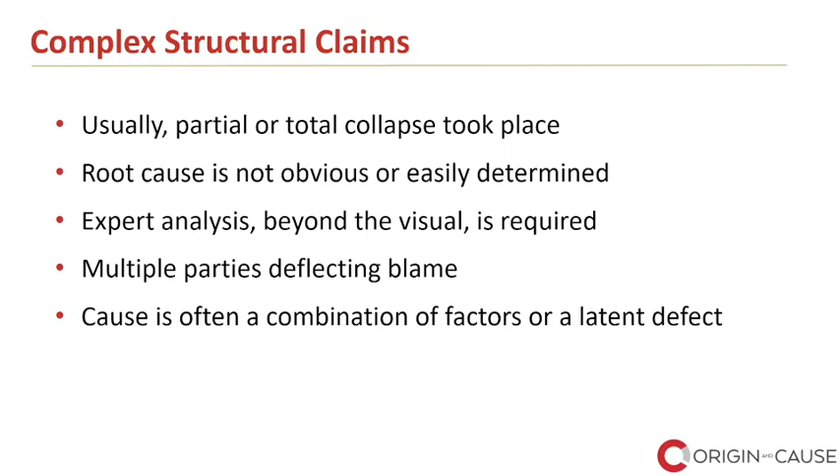So I will have the pleasure of sharing with you the first case study, and it is simply a mixed-use historic masonry building where the file, or the claim, started as simply a fire loss, like any other fire loss, and unfortunately ended up with a total loss of the building, complete reconstruction.

And the story goes that one of the occupants on the second floor had some argument with one of his associates. The argument escalated, the person comes back and sets the building on fire. So the building is badly damaged, and a restoration contractor being retained as usual, the contractor proceeds with gutting out the building for the purpose of restoration.

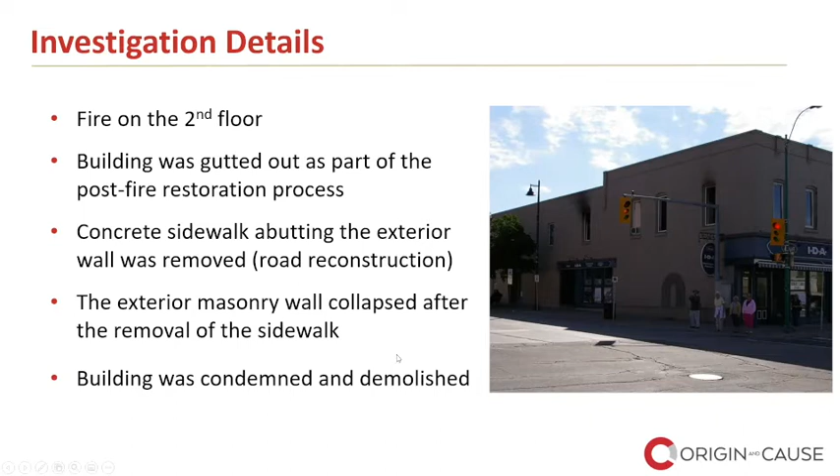This caused the exterior leaf of this wall to partially collapse, and the building was condemned and had to be reconstructed. So what happened, and how did this masonry wall collapse?

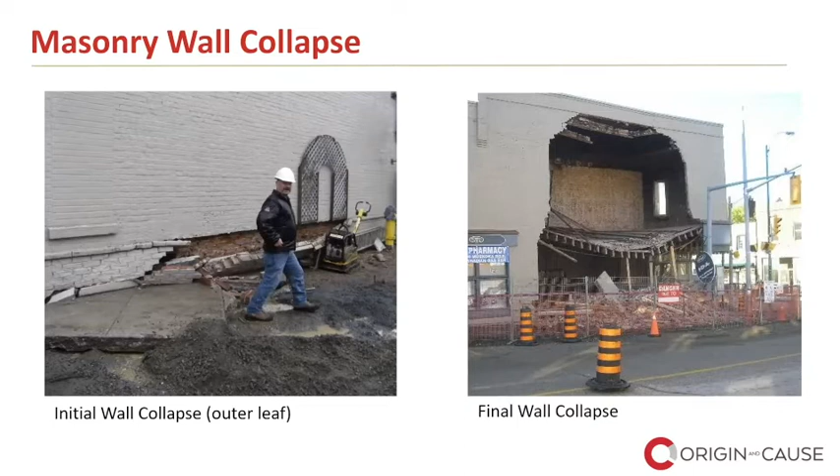Obviously, the building was unsafe at this point, and there was an imminent danger of complete collapse. So the decision was made to have controlled demolition instead of waiting for the building to collapse on its own.

In the construction prior to the incident, it appears that the exterior leaf, at least part of it, was bearing directly on the concrete sidewalk. When the contractor removed this, that caused this portion of the wall to collapse as well.

What's the impact of that on the load-bearing capacity of the wall? When the wall is in its original construction, intact, with two leaves tied together, we'll call this full capacity of the wall, 100% capacity. Over time, and remember this is a 100-year-old building, those connections, those ties between the two leaves start to crack and separate. So instead of having one intact thick masonry wall, you have a wall consisting of two layers acting separately. The impact of that is a reduction by about 50% in capacity, reduced to half.

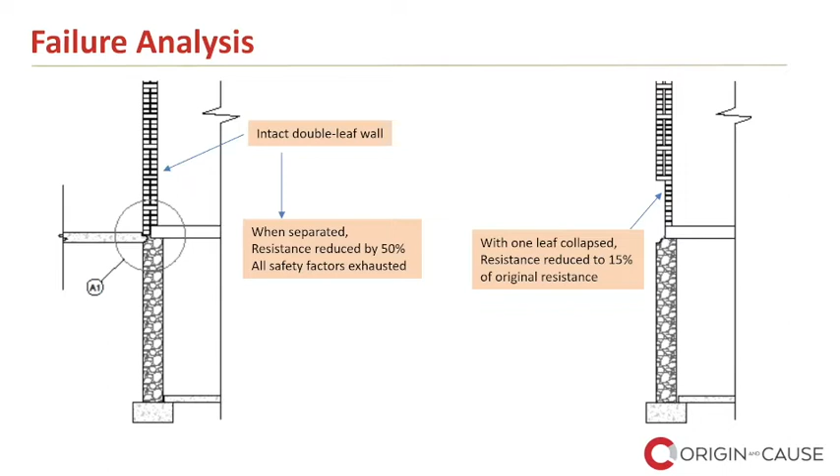Now, moving to the right-hand side, we have the wall already separated into two separate leaves. Remember, this inner leaf was found to be cracked and bulged in after the removal of finishes because of the fire, so it's already deteriorated. We lost a section of the exterior leaf of this wall, and our structural analysis showed that the remaining capacity of this wall was down to only 15% of its full original capacity. There is no surprise that the wall fell, and the failure of the wall triggered the building being unsafe, causing it to be condemned and needing reconstruction.

So what caused the building to collapse? Well, the building was over 100 years old, with deterioration to one of the leaves of the masonry walls, up to 3mm wide cracks. The two leaves had already separated, and we have discussed the impact of that on resistance.

There was some discussion as to whether fire contributed to the collapse of the wall. We demonstrated through our analysis that even if the fire incident did not take place, the exterior masonry walls would have collapsed due to the removal of the concrete sidewalk. Once you remove this major load-bearing exterior wall, that compromised the structural integrity of the entire building and required the building to be demolished and reconstructed. That was a case where it started as an unremarkable fire loss and unfortunately turned into a total loss.

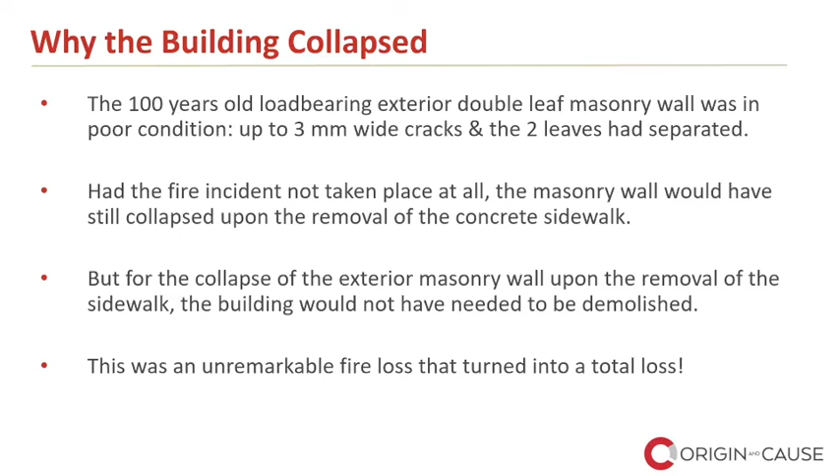Now I'm going to pass it on to Amir to share with you another case study.

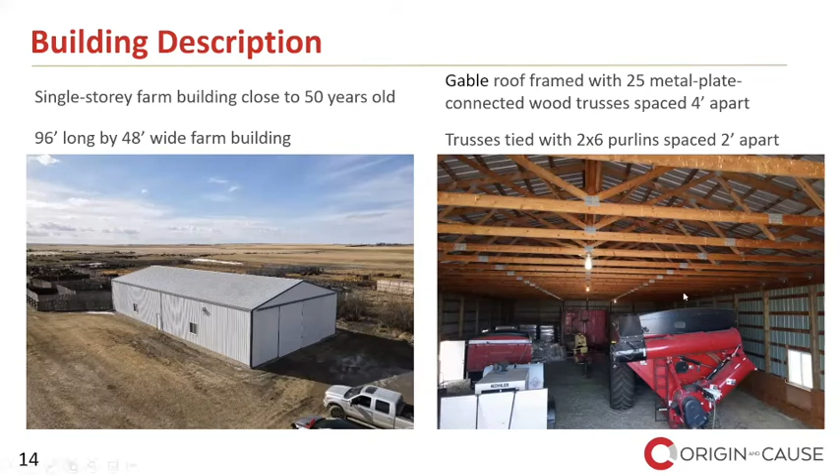The farm building was equipped with a 24-foot wide sliding door on the north wall. The door bottom track was secured to both a concrete grade beam and the wall. At the time of our examination, the sliding door was not functioning properly. Roughly a 2-inch gap was observed at the top between the door panels, and a wider clearance was observed near the corner between the sliding door when it was open and the bottom track.

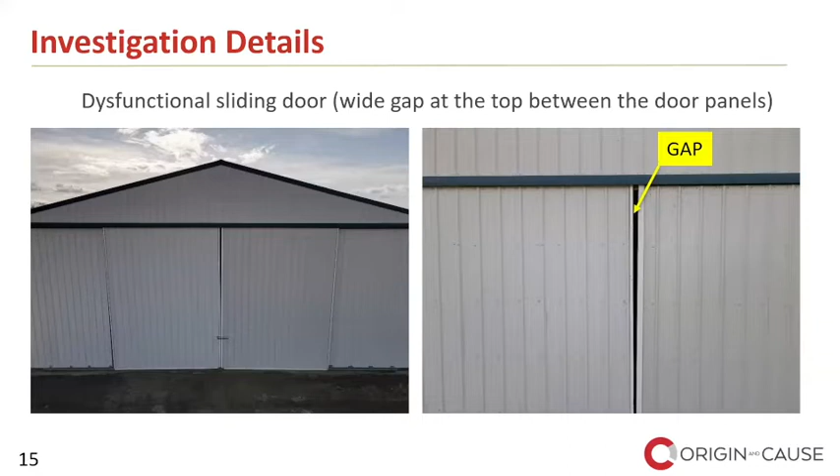Also, a slight uplift and bowing in the roof and wall were observed. You can see the uplift here, and if you notice the shadow on the left photo, that clearly tells you there was an uplift on this corner. There was also a bowing on the opposite side of the uplift in the farm building.

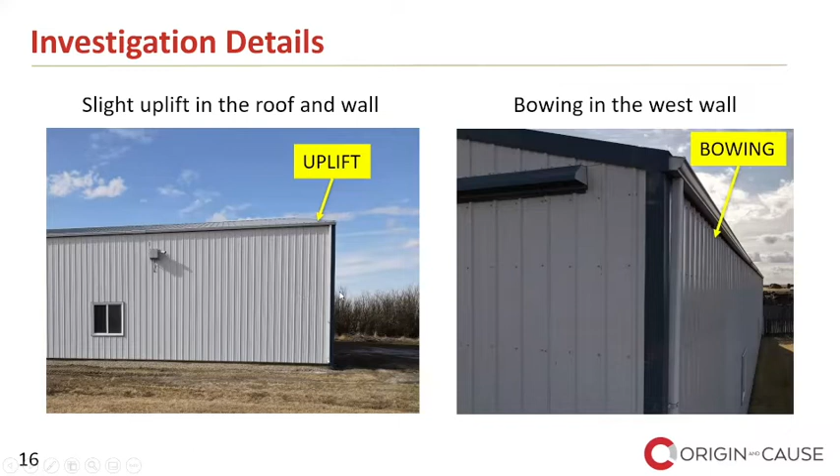In addition, a slight uplift in the post and the surrounding soil was observed along one of the walls. Looking from inside at the plywood I showed you previously, it was sloped almost about 1 degree upward, indicating that this end had been uplifted. So there was something going on there.

So the uplift of the frontal side of the building seemed to have been an ongoing issue for almost 4 or 5 years, and it was estimated to be about 4 or 5 inches. If you're looking from the elevation view of the building, this is the building drawing that we developed. So the uplift was around here, and you can see the plywood sheet we put here, 1/2 inch thick plywood.

Inside the building, these were installed later on after the first incident of the uplift. They thought that could help alleviate the issue of uplifting around the corner. It didn't help. What they did after, they used hydrovac. Hydrovac was performed on all the timber posts, to remove the problematic soil and replace it with 1-inch tamped gravel around the wood post.

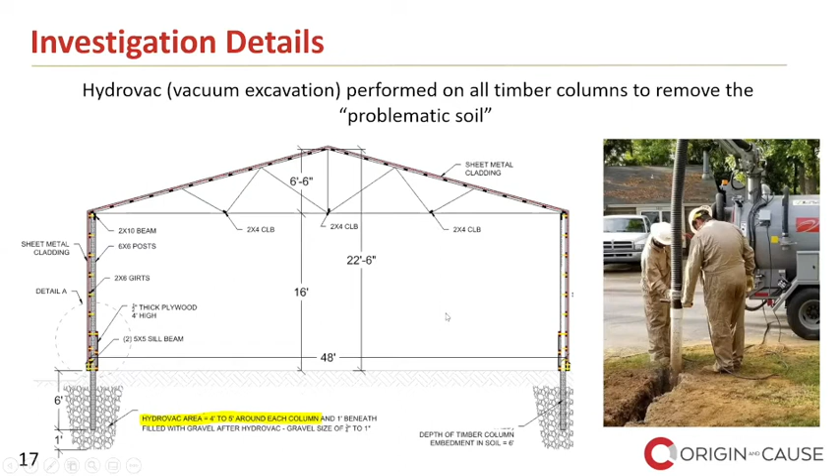Just for your information, hydrovac or vacuum excavation is a non-destructive digging process, a method of suction excavation which consists of injecting pressurized water and using a vacuum system to dig out the soil. So they also did this one. They added plywood inside, did a hydrovac, and still the issue exists.

So when I got into this project, I just wanted to understand, okay, let's look at it from all different angles. So we look at the wind gust. Since this building was almost 50 years old, either the 1965 or 1970 edition of the Canadian Code for Farm Buildings would have been in effect at the time the subject farm building was constructed. Both editions refer to the National Building Code of Canada for wind design values. The wind design data for the province of Saskatchewan was the same in both the 1965 and 1970 editions of the NBCC.

So if the subject farm building was engineered, it would have been designed to withstand a wind gust of 141 kilometers per hour, based on 1965/1970 NBCC design data for the closest city to the subject property. Based on Environment and Climate Change Canada data, the maximum wind gust recorded at the nearest location to the subject building was 89 kilometers per hour, which is less than the 141 kilometer per hour design wind speed.

So if you look at this graph here, this shows the months in 2020 from January to June for four different locations close to the subject property. The maximum wind gust was 89 kilometers per hour, in May. So it's really lower than the design code.

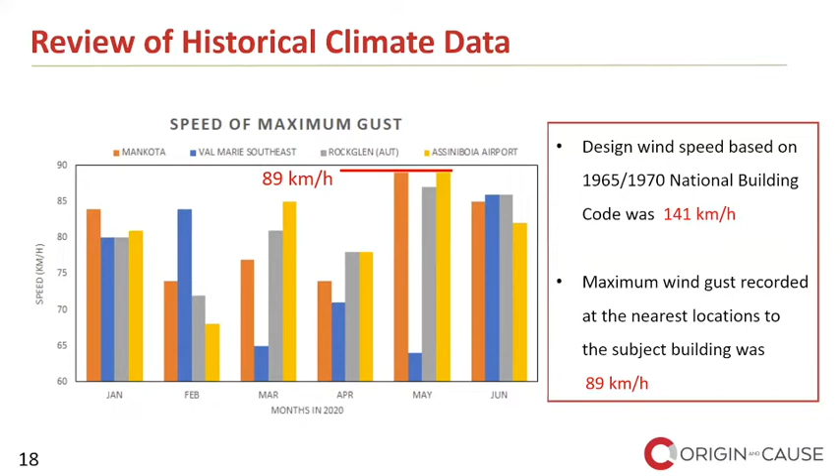So then we said, okay, let's get a closer look at the drawing, because the wind gust was not above the design. So what was the issue? If you look at this here, the top one shows the as-built drawings, and the bottom one is just a photo of the south frame and north frame, showing two diagonal braces on the north wall.

This is the north frame, north wall, on the sides of the sliding door, and one brace on the west end of the south wall was observed. No diagonal braces were noted in either the east or west walls, or across the bottom chord of the roof trusses.

In addition to resisting gravitational loads, or downward vertical loads such as self-weight and snow loads -- these are gravity loads -- a structure must also be properly framed and designed to resist lateral load imparted from wind pressure. The farm building did not have adequate framing to resist lateral load. Only discontinuous bracing was observed on the north wall on either side of the sliding door. You can see that here.

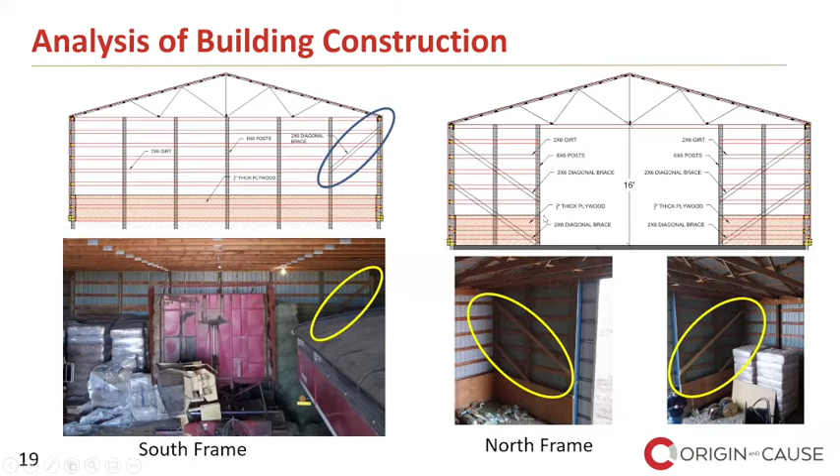Then we came and looked closer at the plan view of the drawings just to understand the framing and structure of the building. As you can see here, this is a plan view. The north and south end walls were the only members and only part providing resistance to wind blowing in the north-south direction. The 24 foot wide sliding door here, that opening, reduced the stiffness of the north wall by approximately 50% compared to the south one.

So zooming in here, this imbalance between the stiffness of the end walls resulted in the development of twisting of the building under wind pressure acting in the longitudinal direction. The twisting of the building lifted the post on the north wall east of the sliding door here. This was the location where we had the problem.

So if you look here, the imbalance or the difference between center of mass and center of rigidity causes the twisting of the building. The more distance you have between these 2 points, the more twisting the building would experience.

Just for your information, the center of mass is the point where the entire mass of the floor acts, and the center of rigidity, or sometimes we call it stiffness, is where the entire stiffness of the building acts. So that obviously clearly answers what the issue was.

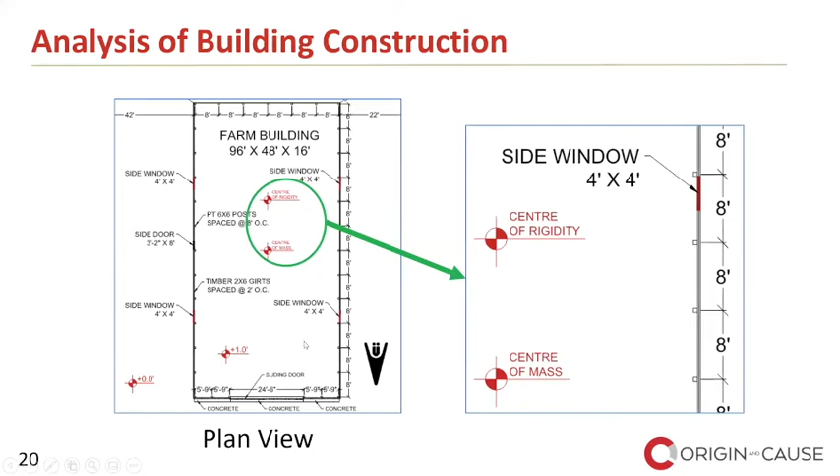Just to summarize why the building lifted: we couldn't find evidence that the subject farm building was properly engineered. Also, as shown in the previous slides, the wind pressure never exceeded the building design code of 141 kilometers per hour.

We found significant pre-existing structural deficiencies that rendered the building particularly vulnerable to twisting and uplift under wind load. But for these pre-existing structural deficiencies, the farm building would not have sustained the reported damage, because it lacked an adequate lateral load resisting system, and the roof trusses were widely spaced.

Wood posts are typically supported on concrete piers or sonotubes that extend about 4 feet minimum below grade. The posts of the farm building were 6 feet deep in the ground without any bearings, which is analogous to sticking a needle in the ground.

The sill beam may have helped the post resist vertical downward forces, but the only resistance to uplift forces was the friction between the post and the soil.

Although it was well intended, replacing the soil around the post of the farm building with gravel, using the hydrovac technique, most likely weakened the resistance of the embedded post to uplift, because gravel has a lower friction capacity compared to clay or silt.

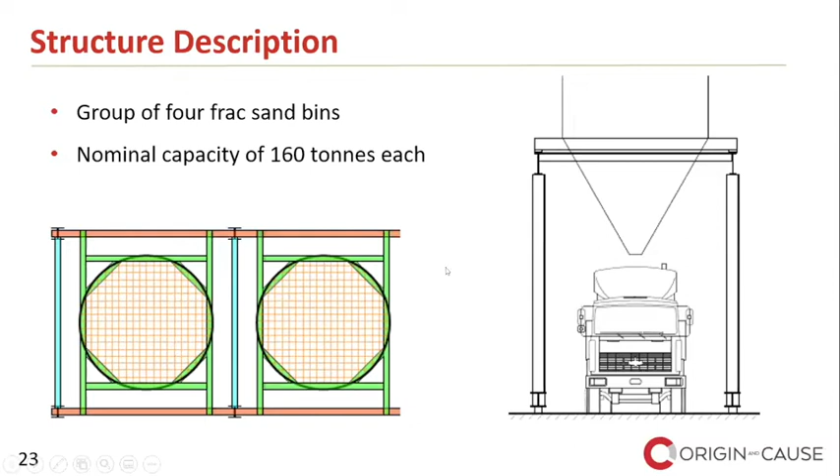The structure had been recently constructed. They had just recently filled bins 1 and 3. Bin 4 was still empty, and on the day of the incident, bin 2 was in the process of being filled.

Some loud noises were heard coming from the structure, so they stopped filling and sounded the alarm to keep personnel away from the bins. Shortly after, bins 2 and 3 came crashing down. A little while later, bin 1 also collapsed. Bin 4 was then removed just to make the site a little bit safer for investigation, because it did present a hazard at that point.

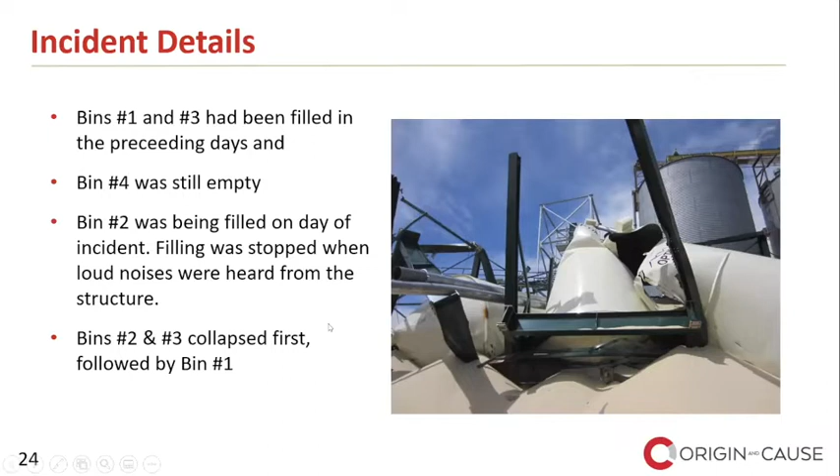So at the onset, there was blame being suggested in all directions. Could it have been something to do with the bin? Could have been something to do with the load cells. The designer of that structural steel frame to elevate those bins, the fabricator of the steel components, the erector—in this case not the same party as the fabricator—the party that put everything together and did all the welding on site. And then also in this case, there was a steel pile foundation, so is it possible that the steel pile installer did something wrong?

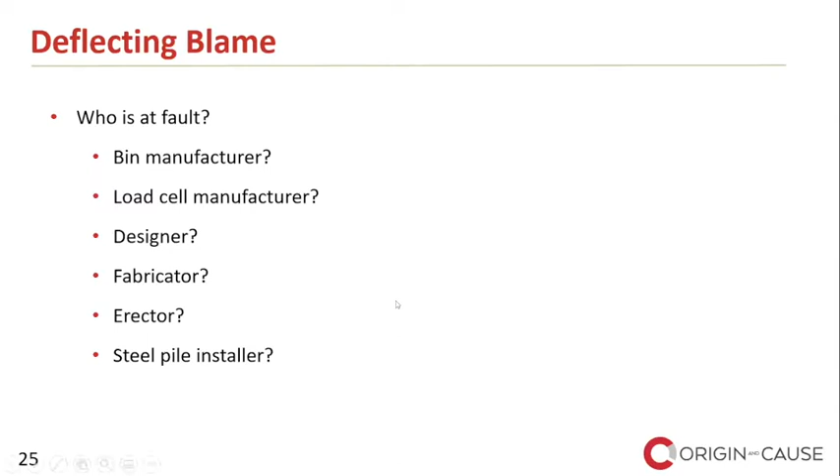We started by analyzing the entire structure, and we didn't find any serious indication of a problem with the columns or the beam sizes. Everything seemed to have been sized correctly. We were able to rule out the foundation and the bin and the load cell pretty quickly. But after ruling out the members themselves, the beams and the columns, we had to take a look at the connections between those parts.

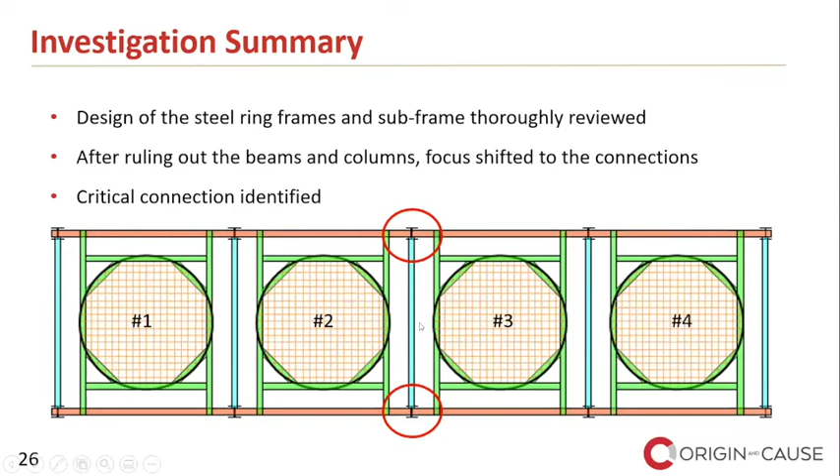So when we started honing in on the connections, we identified this critical connection here at the middle column line. What this was originally envisioned as, when it was designed, was that this would be one continuous girder across 5 columns. But then at some point that was changed so that it was 2 girders joined over the column. And that turned out to be very important.

So that column was originally intended to be continuous, but it was changed to this. Now the end of this beam is sitting on the plate and nothing else. There's nothing under the beam directly below that plate—it's just sitting on a little patch of the plate. And this plate itself is not designed for that type of loading.

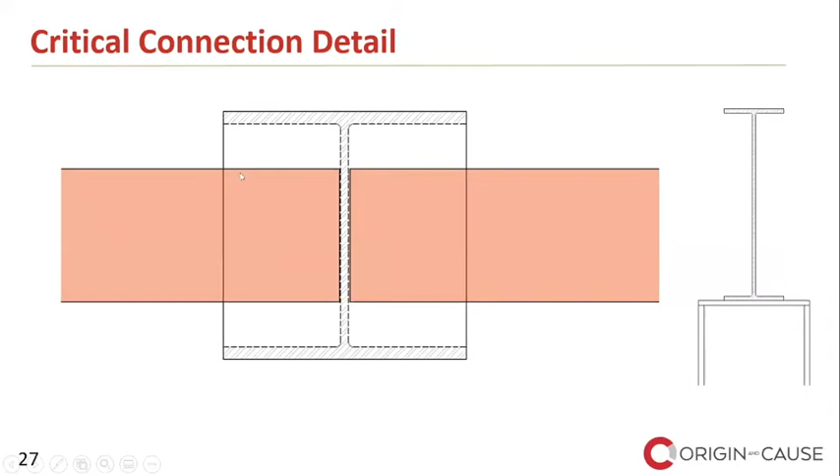But this alone was not—this alone would not have brought the entire structure down. In fact, once it starts to yield, it starts to behave like a stretched sheet or a clothesline. So it would still have reserve capacity as long as nothing else goes wrong, which might have given enough time for someone to see it in an inspection and give some warning.

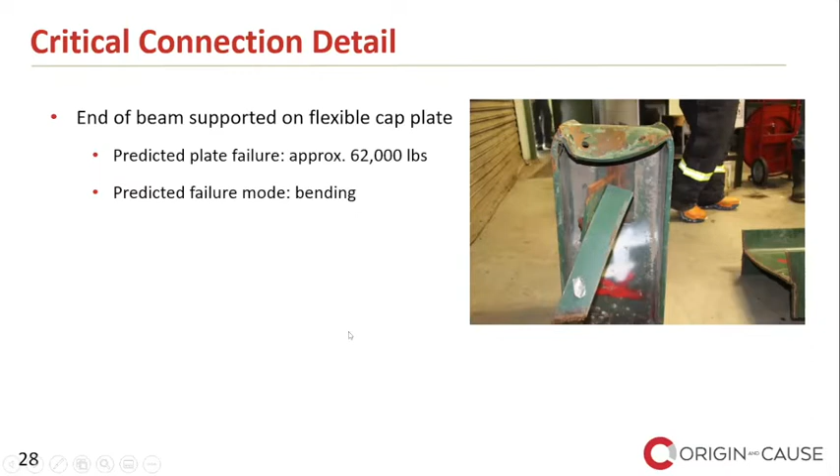We predicted a failure load of about 80,000 pounds, which was awfully close to the estimated load at the time, like when the failure occurred.

So what happened was the plate that this was sitting on, as it started to yield, reduced the effective length that this beam was sitting on—the effective support length. Then this web crippling occurred, and then the final straw was just the bolts holding everything together snapping and tearing out.

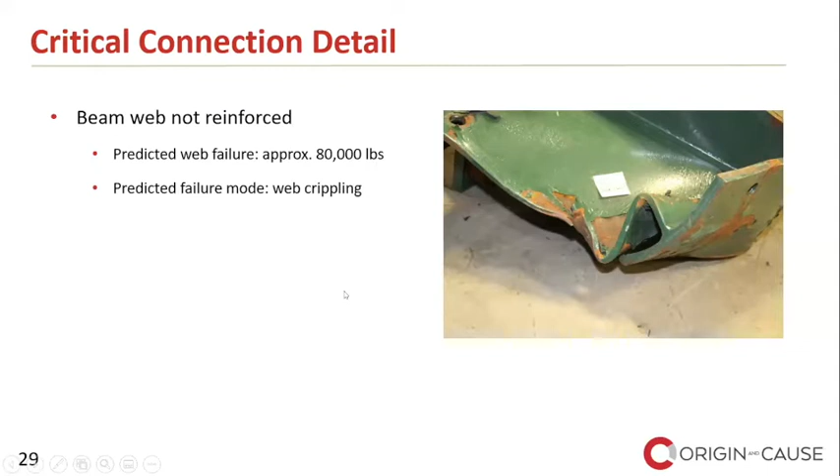This collapse of the sand bin structure and significant interruption to their business all came down to a single connection that conceptually was changed, but that decision to change that connection was not followed through and checked to make sure that we had a load path that was still acceptable.

So the column cap plates first began to yield. That reduced the effective support length for the beams. Beam web crippling occurred, and then finally the bolts holding the beams onto the columns failed, resulting in bins 2 and 3 collapsing. The extensive amount of damage to the structure just in the process of collapsing resulted in bin 1 also collapsing.

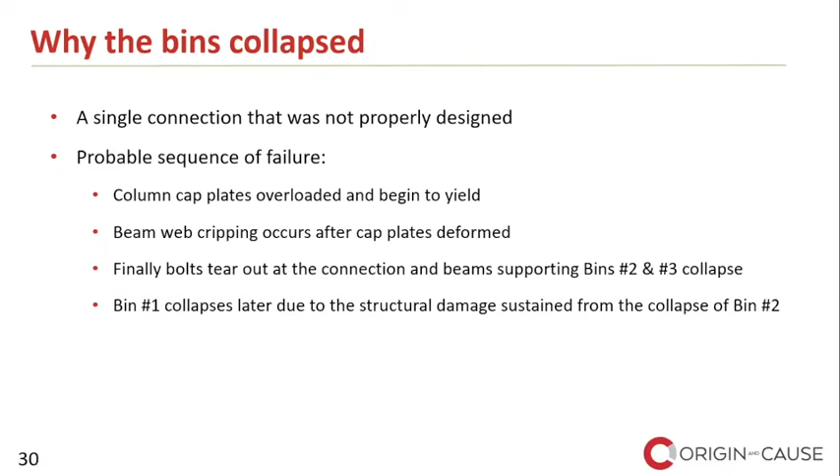And with that, I will hand things off to my colleague, Navi.

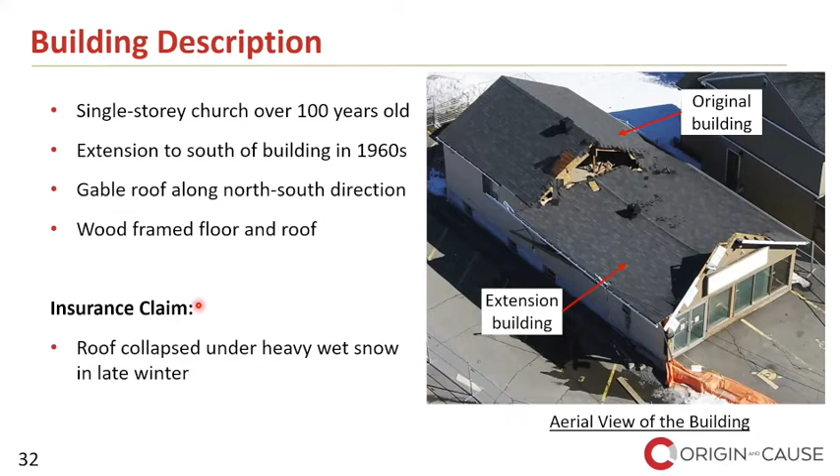Now, why is this a complex claim? First of all, it was an unsafe condition. I could not get inside the building or even get around the building to see the connections or the failed members. The other factor is the nature of the incident, by that I mean the sudden roof collapse of a public building.

Now, I should explain that public buildings have stringent design requirements by the code. Usually we see a roof collapse, let's say in warehouses or farm buildings, that have relaxed design requirements. But when it comes to residential buildings, there are strict requirements. When it comes to public buildings, it's even more strict requirements.

And the rare failure mechanism—I will explain later how it collapsed—was the edges slid out and the gable roof literally turned into a flat roof here. As you can see, there's no attic left under the collapsed roof of the extension. That's a very rare failure mechanism.

Usually if we see some damage to the roof, there's maybe a couple of rafters that get cracked or they get deflected, or the roof is sagging. The damage is usually of this type, but for a roof to collapse, for the entire roof to collapse like this, is a rare case. And the claim value was about $1 million.

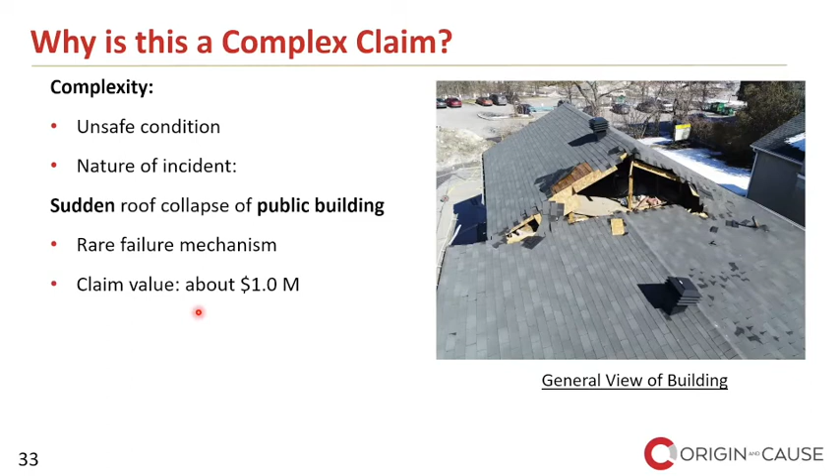Now, for investigation, we started the investigation and we noticed that, as I mentioned, the collapse was only concentrated in the roof of the extension building. The original building's roof was almost intact. As I said, it was unsafe.

We used a drone to closely look at the details around the roof edges, and also we flew the drone inside the attic of the standing roof. And we looked into the design ground snow load based on the code of the time the extension was built.

That was NBC 1960. Based on the code, it should have been designed for 33 inches of ground snow load. And then we looked at the historical weather data and found that on the date of loss, the ground snow load was 21 inches. And the maximum historical ground snow load for the location of the building was 53 inches.

So right here, you can see that had the building been designed properly to the code of the time, it would have easily carried the snow on the date of loss. So right here, we can say that there must be something wrong with the structure. Now, we should see what was wrong.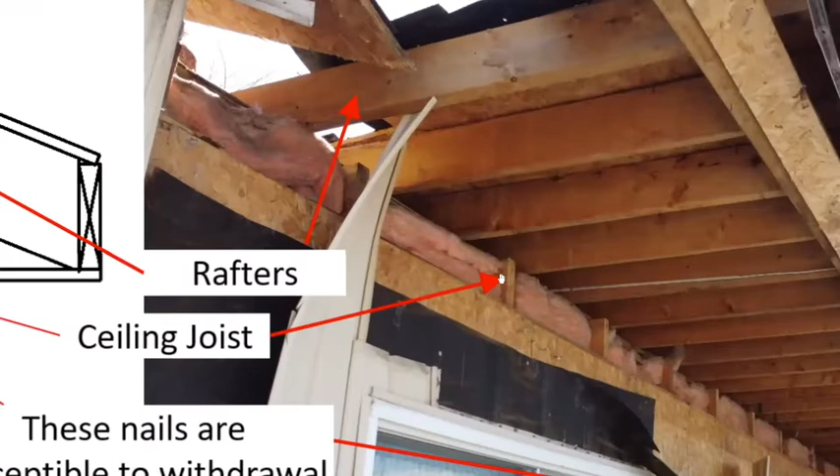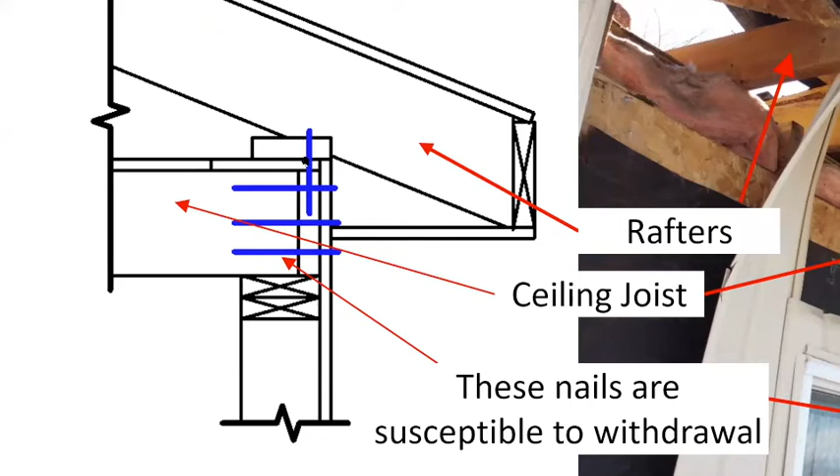So in the photo, you can see the ceiling joist here, this is the rim board. The rim board was up against the ceiling joist. These are the rafters, sitting on a top plate, and this is a piece of OSB. This was a top plate, the rafter was sitting on it, and the rim board was just connected to the ceiling joist. Now the problem here is...

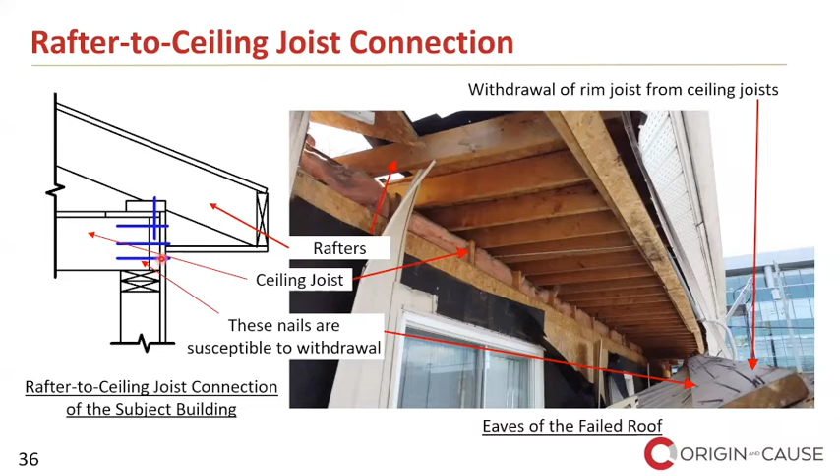There's tension in the ceiling joist, which means these nails were in tension. And the nails, as you know, have a smooth shank, and they were embedded in the end of the ceiling joist. So they are very weak in carrying tension, so they could easily withdraw from the end of the ceiling joist, which is what's happened here.

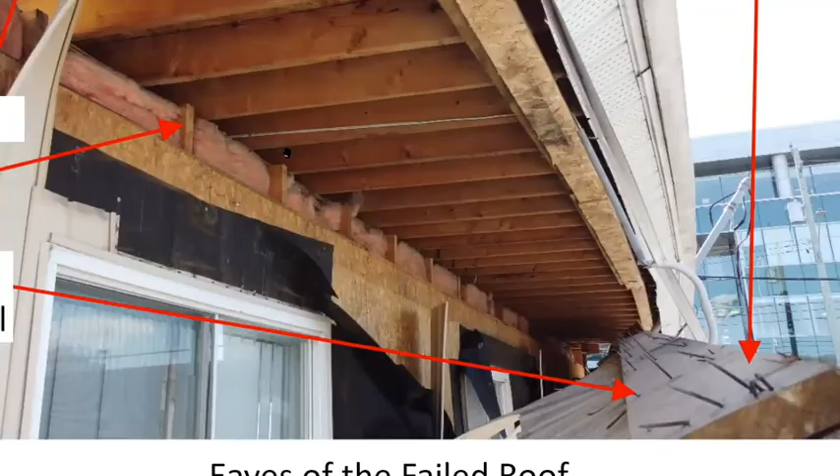Again, the detail of this particular building versus a typical detail. In a typical detail, we have, let's say, 6 or 8 nails face nailed from the ceiling joist to the rafters. In this configuration, the shank of the nails are not in tension, they are in shear. But here, when you nail it like this, the nails are in tension, so they just pull out.

Now, this is not a sudden failure mechanism. This is gradual, which means over many years, over many winters, they pulled out gradually, and then eventually on the date of loss, under some snow, it just collapsed.

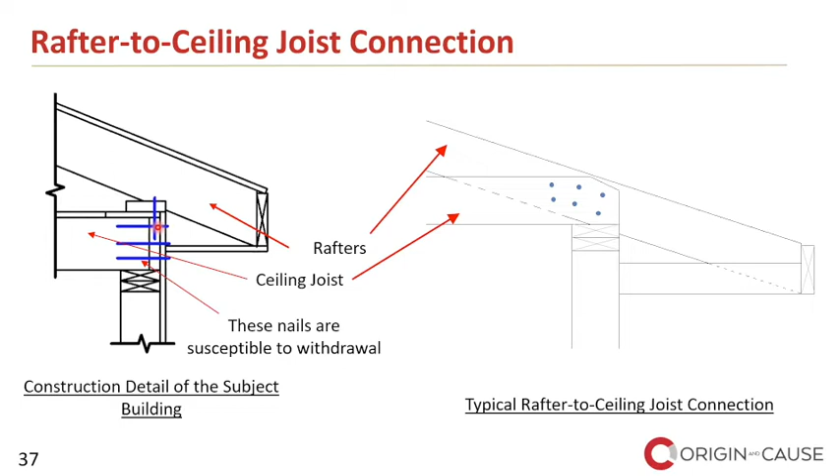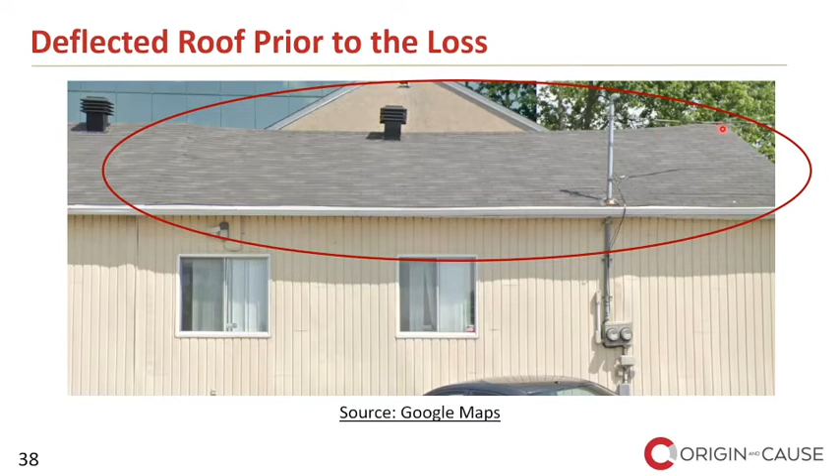This is an image we took from Google Maps that was taken a couple of years before the date of loss, and you can see a significant sagging of the roof. So this is the original building, the roof is good. Here you can see it's just sagging down, exactly like a saddle.

So why did the church roof collapse? The probable cause was pre-existing construction deficiency. It was not the snow. The construction deficiency was the improper connection of rafters to the ceiling joists. The collapse was a result of gradual failure of connections over many years, it was not a single incident. And depth of roof snow on the date of loss was less than the designed snow load. In other words, if it was designed properly, it would not have collapsed.

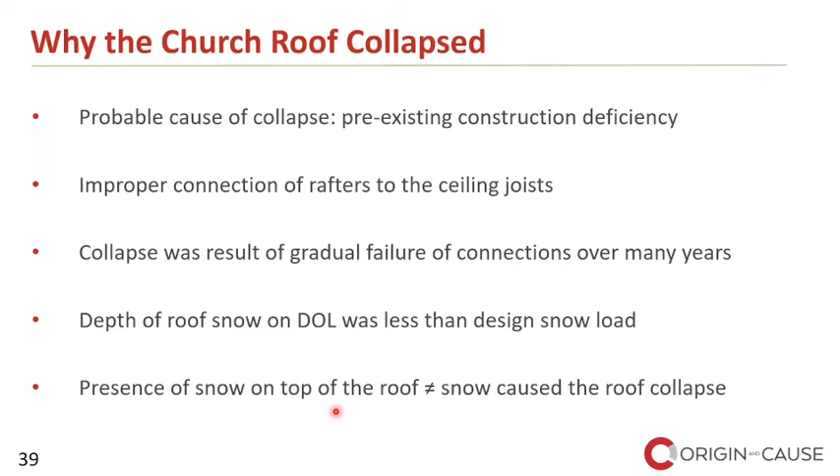The lesson learned from this example is that presence of snow on top of the roof does not necessarily mean the snow caused the roof to collapse.

So based on the case studies that we presented in this presentation, what to look for in a complex claim. First of all, building safety and security is paramount in all claims, especially complex claims or large claims.

A structural engineer should be retained from the get-go, assess the site, and give instructions on the safety measures. There are obligations under orders to remedy unsafe buildings. When there is severe damage, the city usually issues an order to remedy an unsafe condition. Under that order, there's an obligation to retain a structural engineer to assess the site and give safety instructions. So by retaining a structural engineer from the get-go, you're saving time and satisfying these obligations from the beginning.

The impact or role of pre-existing conditions is very common in different losses, also in large losses. As you saw in the previous scenarios presented here, pre-existing conditions can be deterioration of a masonry wall, as in the case study by Yasser, or lack of bracing, as in the case study by Amir, and just lack of a couple of stiffeners or discontinuity of the beam in the case presented by Adam, and also poor detailing in this church.

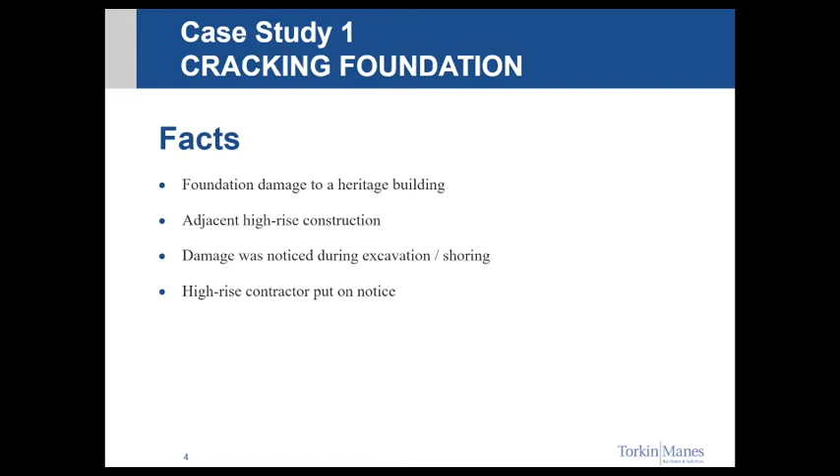The facts of the case were that foundation damage was found in a heritage building. There was an adjacent high-rise construction. Damage was noticed during the excavation and shoring of that high-rise construction. And so the high-rise contractor was put on notice.

Here you can see the east wall of the heritage building that was damaged, and a pretty good look at the excavation and shoring work being performed by the contractors to the east. I wanted to point out that the shoring work is all fairly flat and uniform across the surface. It's consistent, and I want you to keep that in mind because I'm going to refer to it again in an upcoming slide.

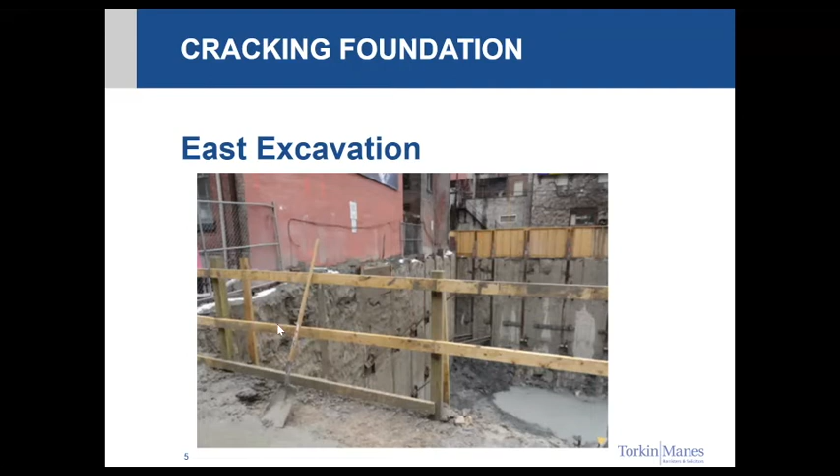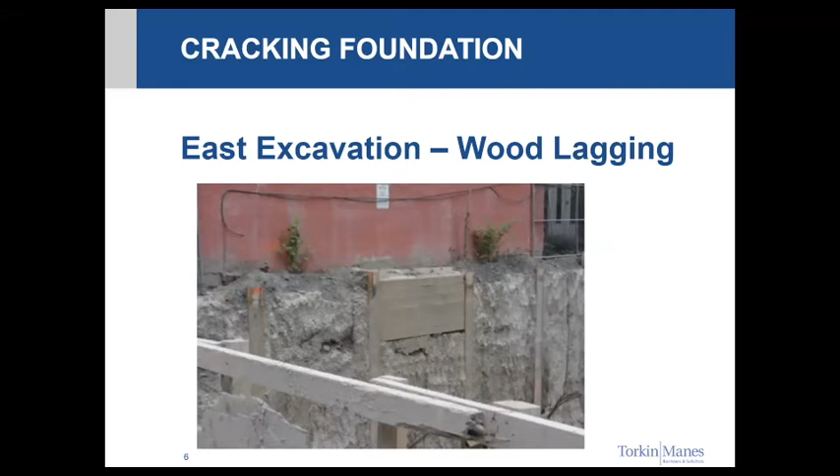This next slide shows the east excavation and some wood lagging that was installed. Not exactly sure why it was installed, but there was interior damage to the foundation of the heritage building on the other side of that lagging, and potentially a source of the foundation damage to the building.

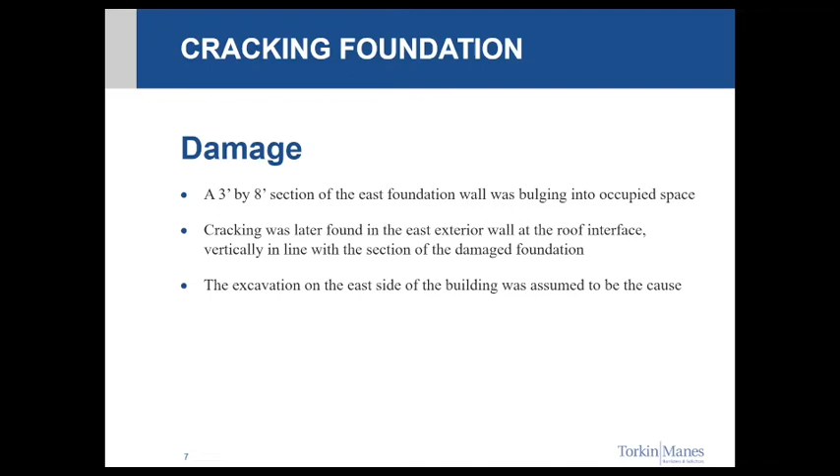The damage itself included a 3x8 section of the east foundation wall. It was bulging into the occupied space. Cracking was later found in the east exterior wall at the roof interface, vertically in line with the section of the damaged foundation. And the excavation on the east side of the building was assumed to be the cause.

Looking at the causation issues, the damage was likely caused during the excavation and scraping of the east wall by the excavator bucket. That's how that uniform surface I referred to was achieved. However, an engineering inspection determined that the cracking and bulging was pre-existing. So we had a problem. The complexity in this case was what damage was pre-existing versus the damage caused by the construction.

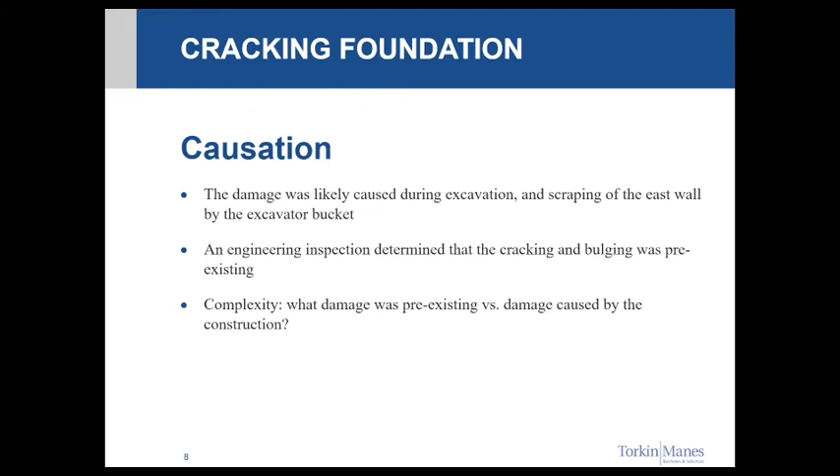The insurance in place: 3 policies. There's a builder's risk policy. It refused coverage, as those typically apply only to property under construction and the project itself where the high rise is being built. So what do we have left? We have a CGL and a wrap-up liability policy. Those insurers refused to become involved because the damage was not caused by any apparent negligence.

The expert opinion determined that the damage was pre-existing and naturally occurring over time, given the age of the building. But on the other hand, there's obvious construction disturbance to the east, along with complaints by the occupants. So we've got a real pickle. The matter looked to be headed toward long drawn out litigation, and yet it resolved within only a few months. And why? What unlocked the stalemate?

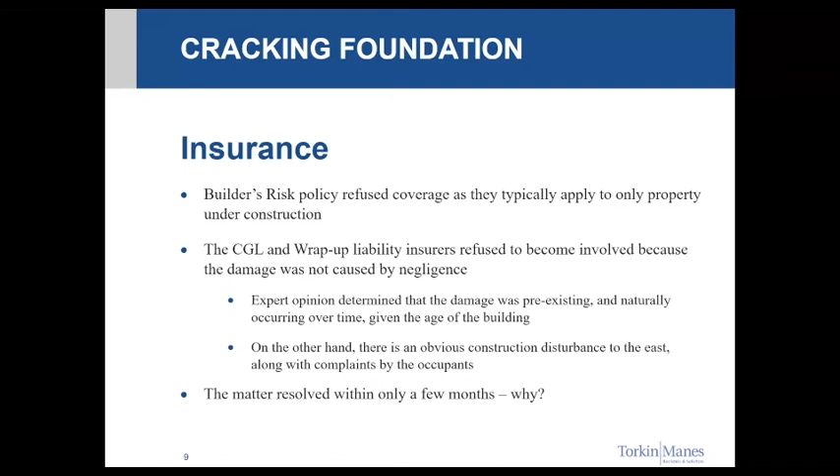Reason one: the ongoing monitoring by the engineer revealed further and additional cracking in the building. The additional cracking was occurring at a rate greater than natural deterioration. The accelerated rate of cracking could only reasonably be related to the construction vibrations.

So the ongoing damage to the heritage building exposed the liability insurers. But there's still this question as to whether the contractors were negligent. Just because this cracking is taking place, it doesn't necessarily mean that the contractors breached the standard of care.

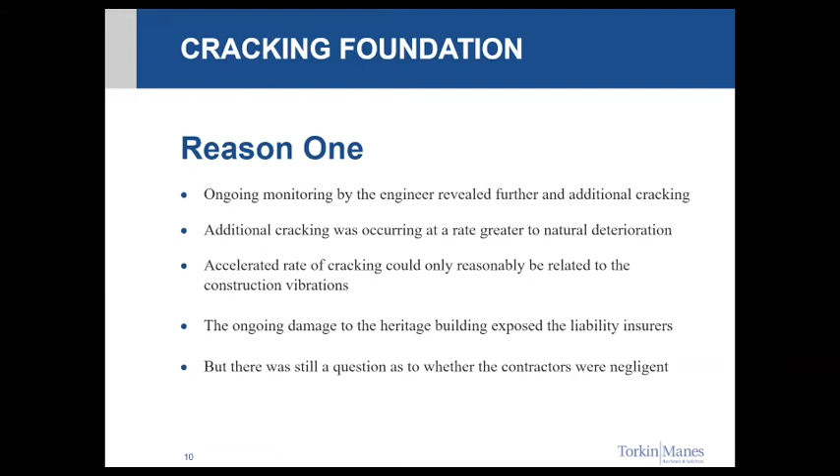The second reason: the heritage building owner secured a tieback and crane swing agreement with the general contractor before construction commenced. The tieback agreement contained an indemnity clause favorable to the heritage building owner. It also included a clause ensuring that the general contractor secure insurance coverage for liability assumed in contract.

The tieback agreement exposed the liability insurers as a result. The agreement itself, the policies both had insured contract exceptions to the typical exclusion for liability assumed in contract.

And I know that there is some debate over what those should apply to and when. In some cases, the insured contracts that provide an exception to the liability in contract exclusion are quite limited. They're sometimes listed as very specific types of contracts, and if you don't fall into any one of those categories, then you don't fall into the exception.

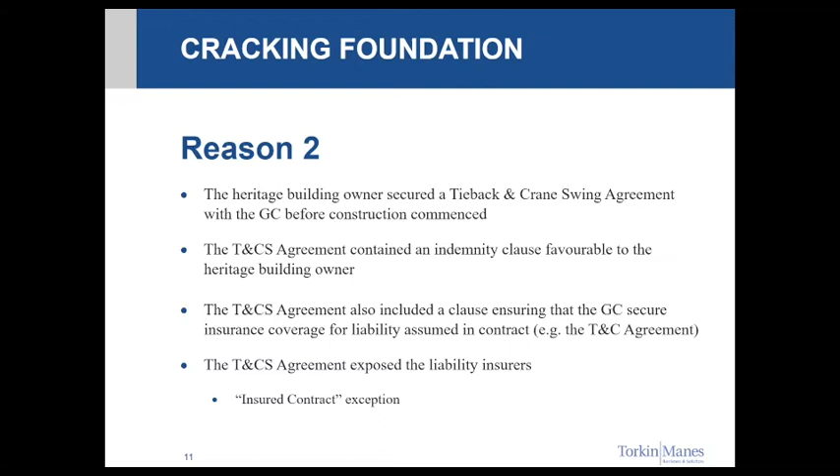And in other cases, it's generally contracts that are usual to the business of the insured. In this case, this type of contract, this tieback agreement, was usual to this insured's business, and so there was exposure. When we look at the indemnity language, it is significantly broad.

I've highlighted the portions of this indemnity language and sort of faded the parts that are less important. So I'll read it out: the company agrees to indemnify and save the owner harmless from and against any and all claims incurred by the owner and arising directly or indirectly out of or in relation to the exercise by the company of the rights granted to the company under the agreement.

So right there you have the words directly, indirectly, or in relation. And the case law generally, looking at this type of wording, will choose the broadest wording and apply it. So whether you think indirectly is broader than in relation to, or vice versa, that determination will be made by a court, and they will apply the broadest language, which I believe - referring to a memo I've read a few years ago - I believe in relation is the broadest language.

And if that's not enough, it goes on to say, and/or in connection with the construction and completion of the project. So whoever drafted this indemnity agreement tried to touch on all the different ways that there could be some kind of connection to a liability.

And then further, if that's not enough, it says that the company agrees to indemnify the owner in respect of all claims arising out of any damage caused to the lands and/or any buildings, the heritage building itself, arising directly or indirectly from or incidental to - again, all the different types of language you might see used once or twice, but all the players are here - with respect to the company's rights granted under the agreement, again, quite broad.

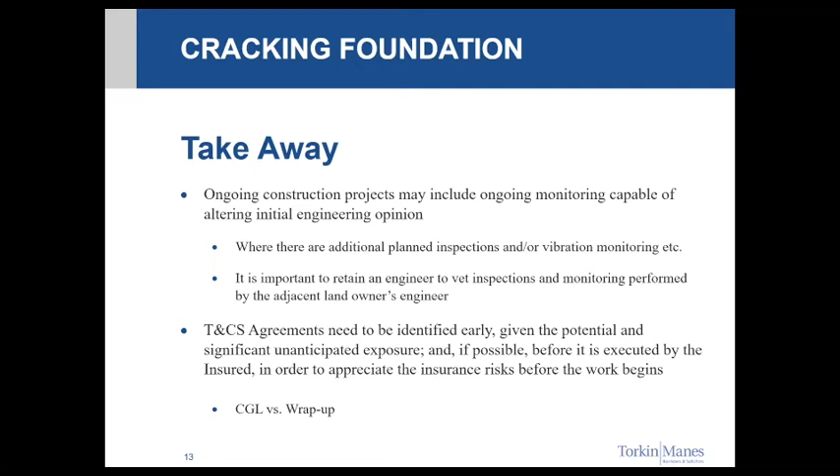This one is a roof collapse. I'm happy that Nabi provided his Gable Roof analysis just a few moments ago, because some of it will be helpful to conceptualizing what's taking place in this example. We have a residential home with a large sprawling roof. The roof shifted under load of snow, causing significant structural damage throughout the home. The homeowner's insurer denied coverage based on the exclusion for faulty workmanship. I chose this example because it's a practical, down-to-earth example of damage to a home that everyone can wrap their heads around, and because the faulty workmanship exclusion has broad application across a number of different types of policies, so the issues can overlap depending on what you're working on.

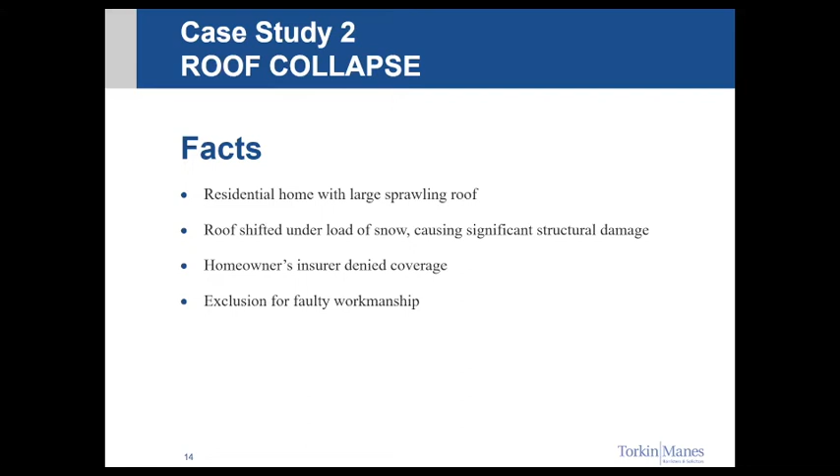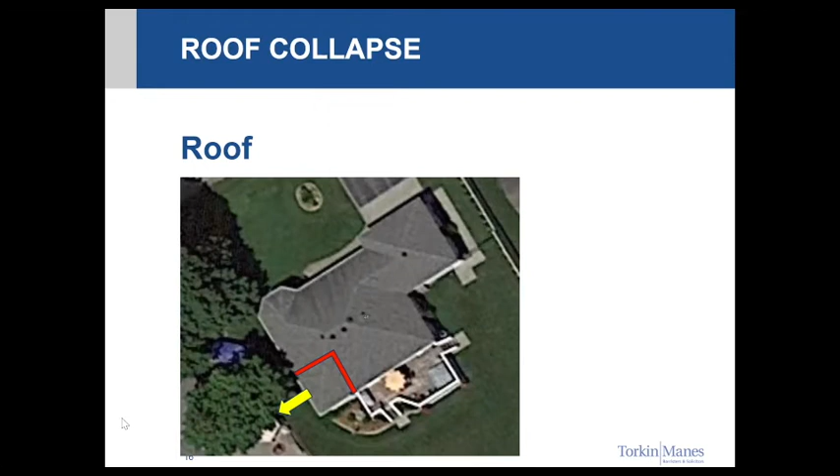Underneath that right angle was the den for the home, which had a cathedral ceiling. Here is an exemplar photo of a cathedral ceiling to show the problems. You can see on the edges of the two walls there are 2x8 or 2x6 ceiling joists running across the entire length of the room. If those joists were spaced out across the ceiling, you'd have a flat ceiling, but to create the vaulted or cathedral appearance, you have to remove the ceiling joists, which requires the rafters to be adequately braced in the absence of those joists.

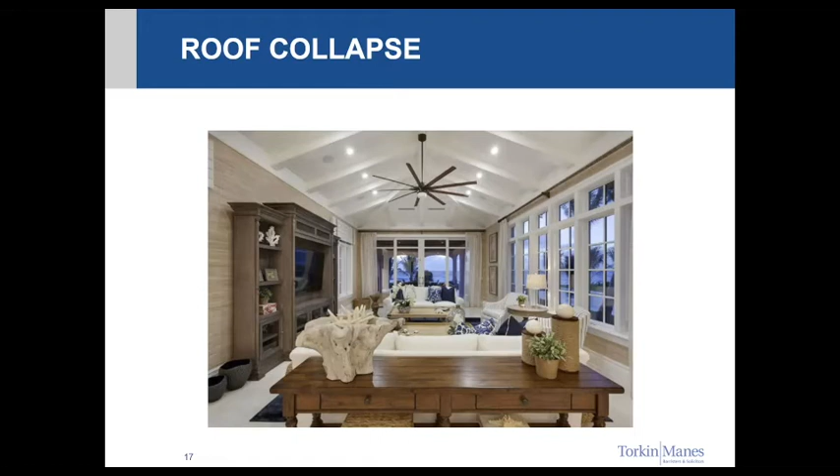The next photo is a picture of the framing of the actual home from 30 or 40 years ago—we were fortunate enough to get this photograph. To the left is a wall separating the den and the kitchen. This red line is something I've added, underlining the edge of the kitchen wall. Just above it, difficult to see given the lighting, there are a number of 2x6 ceiling joists that are cut. This blue line represents what we believe was the designer's intention to extend those joists from the kitchen wall across the den to the exterior wall, which ended up protruding and bowing outward under the snow load when the cathedral roof failure occurred. Had that blue line of joists been installed, it would have provided additional support for the exterior wall, pulling it and securing it against the internal kitchen wall.

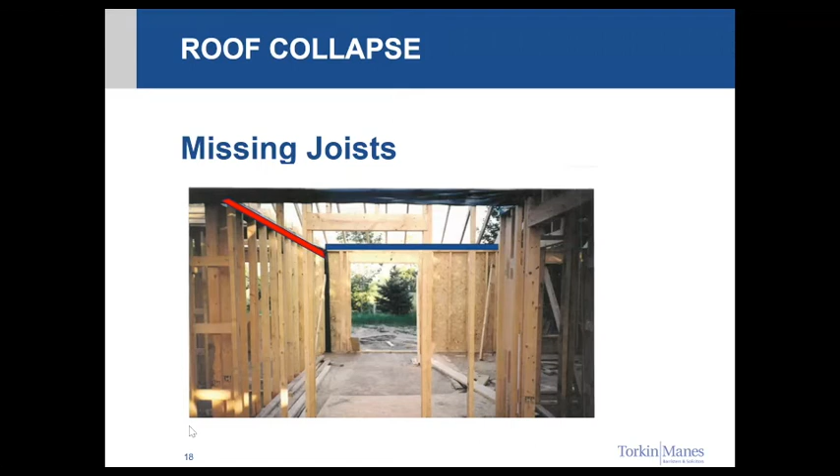So we have a problem now—are we dealing with faulty design, or faulty workmanship? This was an old construction from the 1990s. The design records were not available at the township; the town had switched corporate identities over the years and documents were lost. So there was no way to tell if the issue was related to design or workmanship.

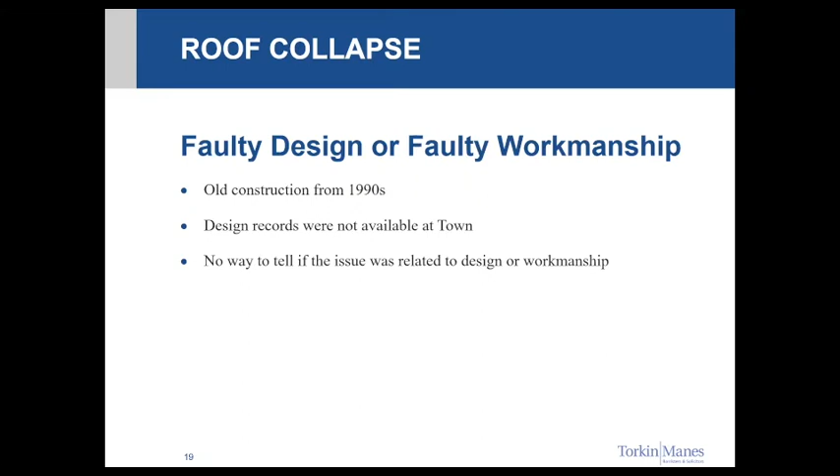So why is that a problem? Well, the burden of proof is the issue. The plaintiff has the burden to prove a claim falls within coverage - I think we can all agree on that. The defendant insurer has the burden to prove the exclusion it relies upon. But in this case, the insurer could not prove the faulty workmanship exclusion because it was equally possible that the design was flawed.

This case of Dawson Creek versus Zurich is a case where the British Columbia Court of Appeal looked at very similar facts. Leave to appeal to the Supreme Court was denied. Virtually identical facts - it was an arena, the roof collapsed under snow load, the building was 40 years old, and there were no records of the original design.

And you have this issue of, are we dealing with faulty workmanship or faulty design? The argument was essentially that it must be one of them. If the builder failed to install the joist, then it's a workmanship issue. If the joists were never supposed to be there by design, then it's a design issue. One of the exclusions must apply.

But the court didn't accept that reasoning. The insurer still had the onus to prove one of the exclusions. Evidence had to be established that would fit into one of the exclusions and satisfy the wording of it. But the lack of records and facts made it impossible to prove any exclusion applied, and so the insurer in Dawson Creek couldn't prove either exclusion.

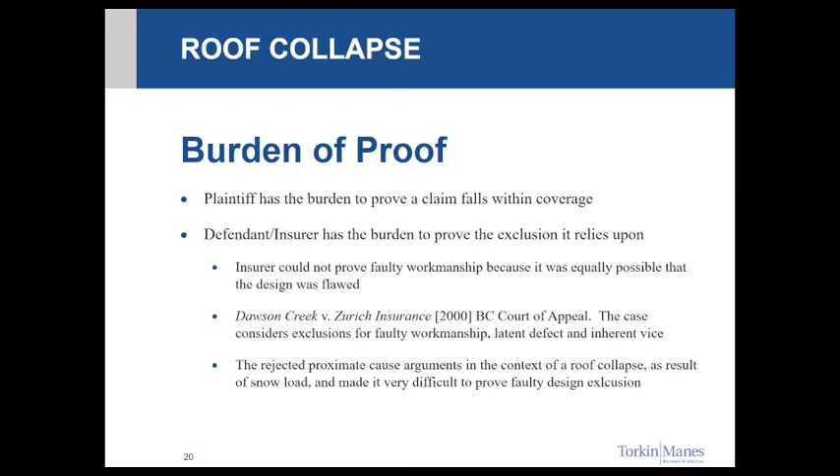Someone came up with the brilliant idea of getting a copy of the subdivision plan and identifying homes where similar models had been built. Those homes were visited, and this turned up. Without it, it would have been impossible to prove the workmanship issue, because it clearly shows that the joist was supposed to be there and that the builder had gone rogue.

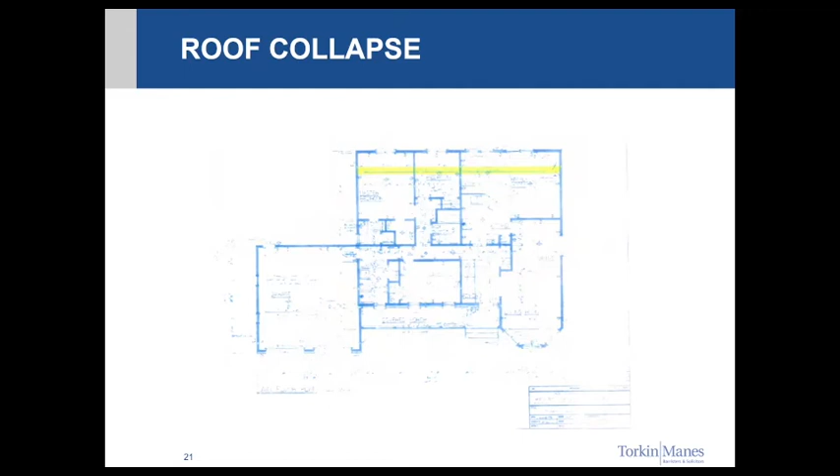And I'm sure most people are familiar with Ledcor, the leading case on the topic.

The window washers wash a number of windows in a commercial building. The windows are all damaged. And the court ultimately determined that the exclusion only applied to the cost of the window washing itself, and the resultant damage to the windows was covered.

In Ledcor, this exception was written into the policy. In Monk, it was not. And Monk is a case where you're dealing with a homeowner's policy as opposed to the commercial policies in the Ledcor decision.

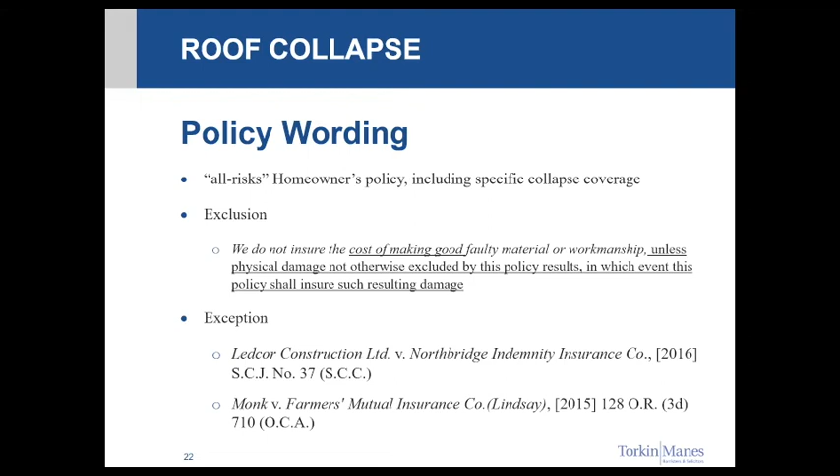Now, the court claimed that it wasn't reading in an exception here. It likely was, but the reasoning is difficult to argue with either way. And so what the plaintiff took from this was an opportunity to say,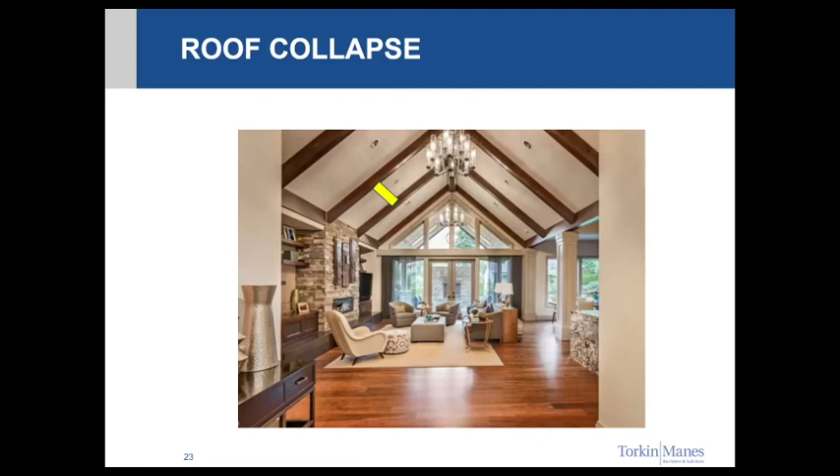So more specifically, the insured's position was that the engineering opinion was that there was a lack of lateral bracing, allowing the rafters to shift in the same direction under a load of snow, almost like dominoes. The same forces push the exterior walls outward, and the lack of lateral bracing could be remedied with inexpensive steel strapping, the cost of making good.

The outcome of this argument, or the point to this argument, was that everything else was resultant damage. The roof, the main floor structure and finishings, the basement foundation and finishings.

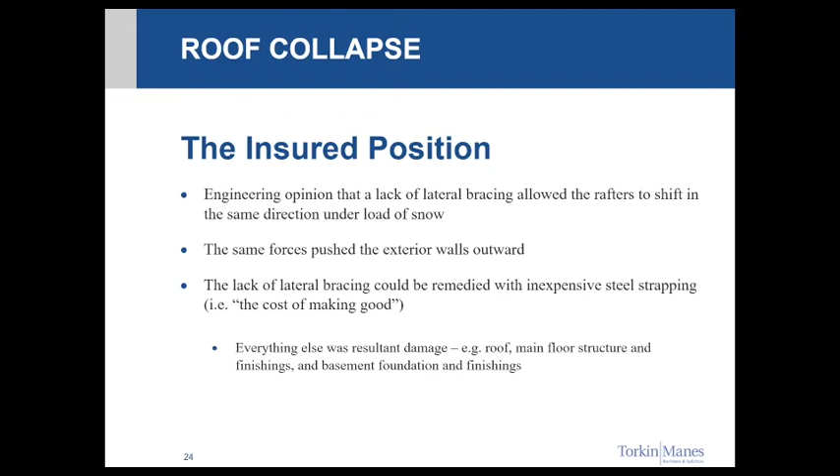And what we ended up determining was that you had a complete failure by the builder to install the roof to code or to the design. The rafters all had to be replaced. Collar ties all had to be replaced. The joists had to be installed, and the cathedral ceiling had to be braced properly.

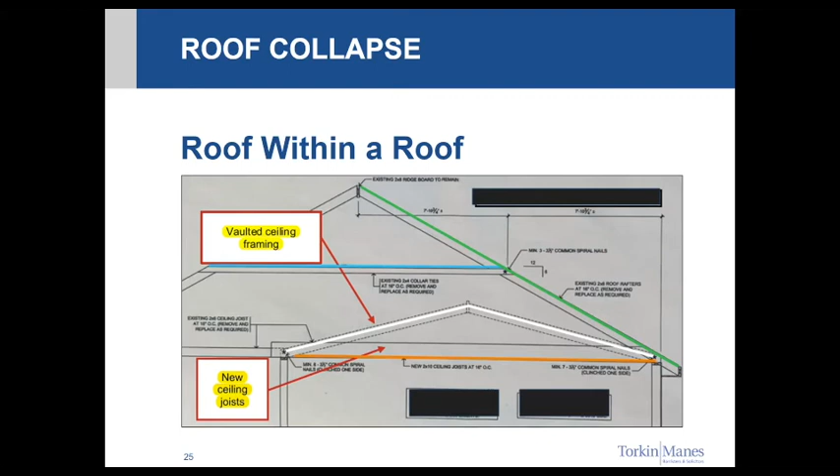And so ultimately the resolution in this case hinged on this question: what was the scope of the resultant damage coverage exception? The builder failed to construct the roof to code, and ultimately the entire roof was excluded for faulty workmanship. The main floor and basement were likely resultant damage.

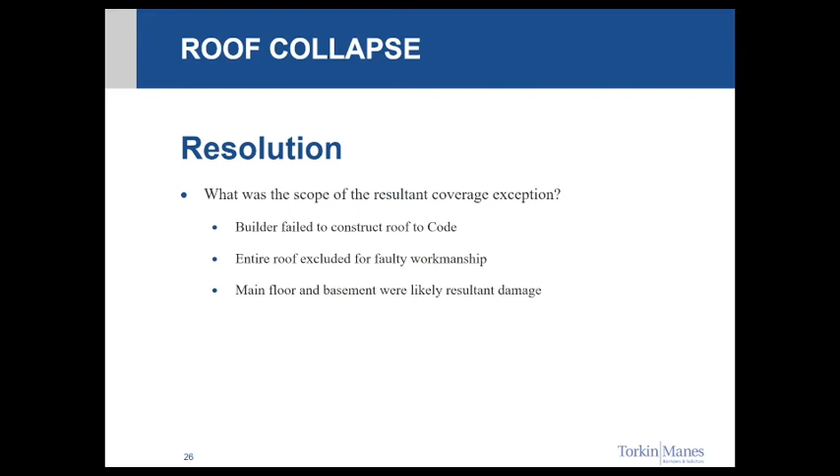And I think it's important as a takeaway for this particular example to consider the fact that the scope of the resultant damage may include larger structures when facts point to a number of overall workmanship failures. And typically, this exclusion applies to only very limited items, often that are of an insignificant cost,

such as this lateral bracing that was being argued in this case, or the window washing in the Ledcor case. But it does appear possible that where there are larger structural issues and the contractor is responsible for a multitude of them, that it is possible to exclude a larger piece of the loss. And I think that this can potentially apply similarly across several policies, both commercial and residential.

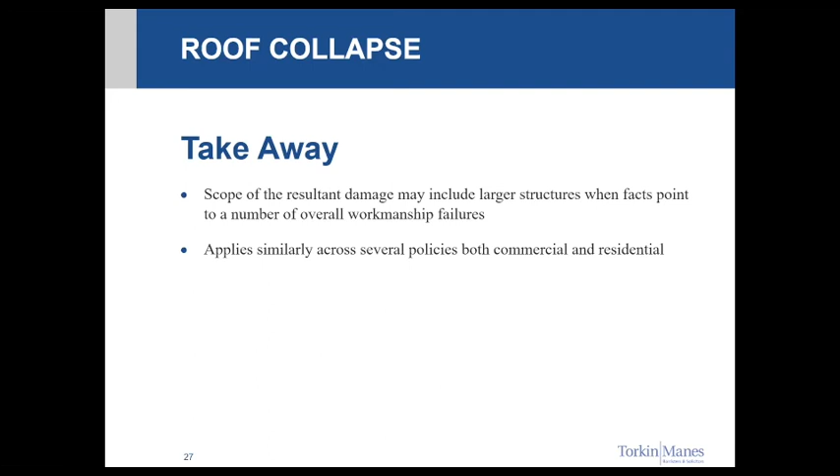Okay, the final case study is a concurrent coverage case.

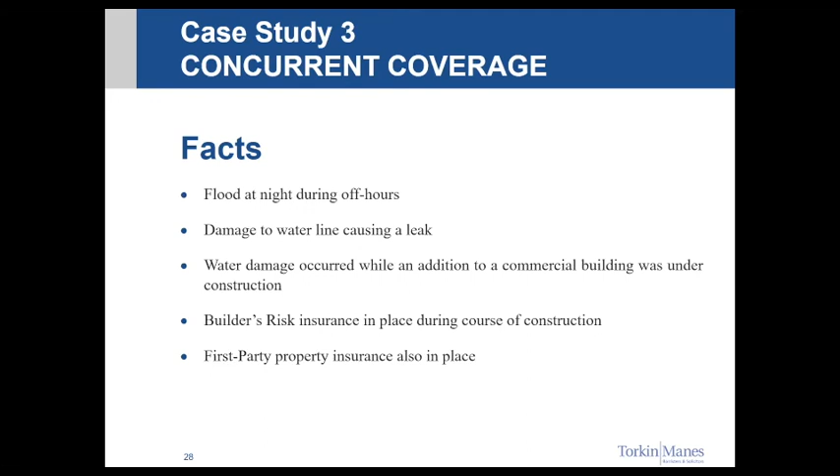The facts of this case are a flood. It occurred at night during off hours. There's damage to a water line causing a leak. The water damage occurred while an addition to a commercial building was under construction, and there was a builder's risk insurance policy in place during construction for the addition. There was also first-party property insurance in place for the existing building. The water line failure caused damage throughout the commercial building, both the existing building and the addition under construction. So I'm sure some of you can see where this is going. The concurrent coverage was the first party property for the existing building and the builder's risk COC.

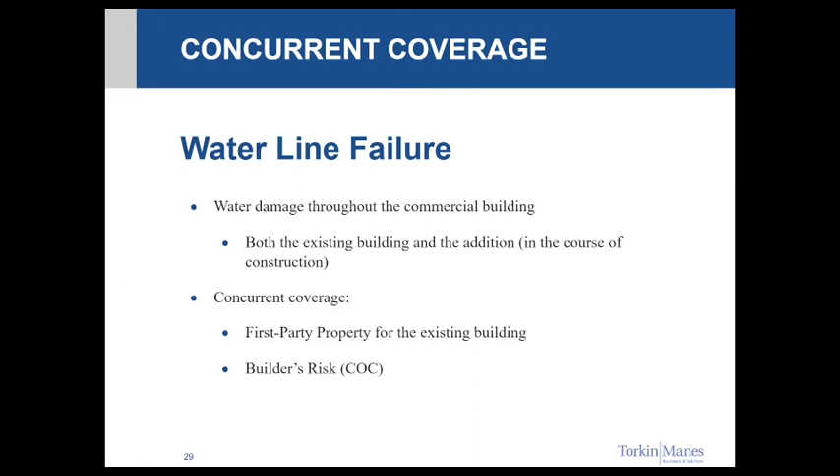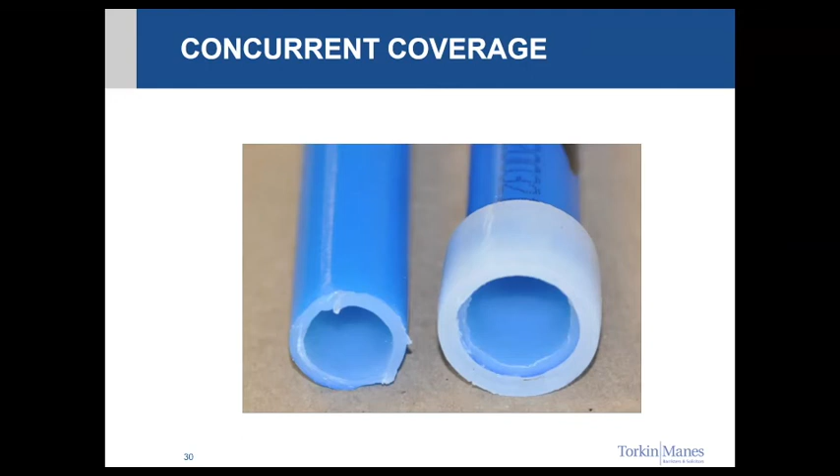The issues that came up: who is covered under the builder's risk? Well, that would have been the owner, also covered under the first party property policy, GC subcontractor, security staff, and it also covered the suppliers, which is not always the case, but it was in this particular instance.

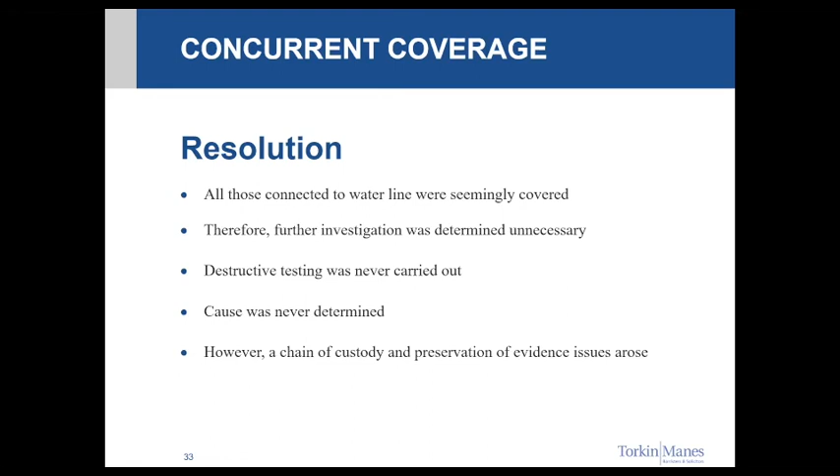So the cautionary note here is, what about the manufacturer? Was there a manufacturing warranty that would have responded to this loss? If so, was there a breach of that warranty by removing the pipe and not ensuring a chain of custody, not providing the manufacturer with an opportunity to inspect in the circumstances? Were they a potential defendant? Or was this not a manufacturing issue at all, in which case this was all a red herring? And even if there were some exposure on the manufacturer, there's a potential for a limited liability clause in the warranty wording as well. So whether this manufacturer would have ever been responsible is difficult to say and potentially unlikely, but we've included it as a cautionary note because it's a party not to forget about in these situations, and to include in the investigation in order to honor any warranty that could potentially be available.

Moving on, who is going to cover this loss? The builder's risk insurance applied to the property in the course of construction. The first party property insurance applied to the property, generally speaking. The issues that arose were subrogation. The first party property insurer was claiming to be prejudiced by the investigation of the builder's risk insurer because that investigation was mainly carried out by the builder's risk insurer, but that was a sort of secondary issue.

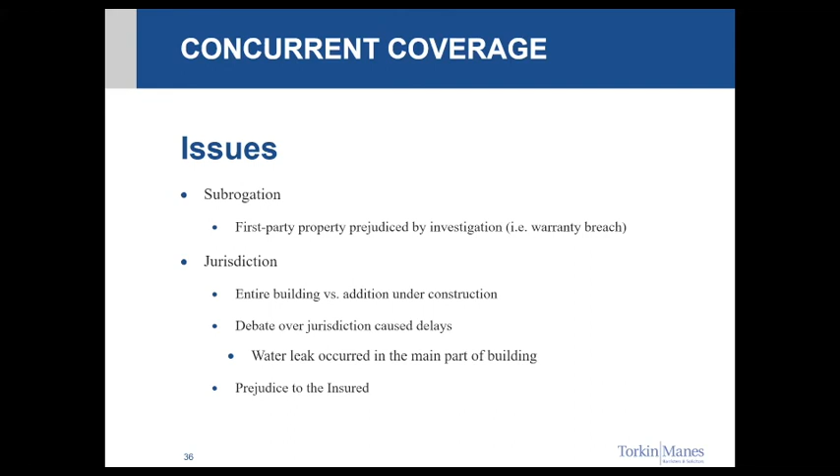The main issue was jurisdiction: the entire building versus the addition under construction. How are the two insurance companies going to divide this loss? The problem was that the debate over jurisdiction caused delays and potentially caused prejudice to the insured because those delays prevented the repair of the building from occurring in a timely manner. So what you have is a delay that caused the builder's risk soft cost coverage to inflate, while at the same time caused the first party property insurer's business interruption coverage to inflate. I'm going to propose a resolution for this type of situation at the end of this case study, but just keep those cost increase issues in mind.

Looking at the case law, Pre-Eng v. Intact Insurance is a 2019 decision, very straightforward. A construction project involved repairs to the roof over a school gymnasium. Only the roof was in the course of construction. The gymnasium floor was damaged, however, during the course of construction. Okay, what did the policy for the builder's risk insurance say?

It said that this form insures the following items at the project site, which included the building and the lands, the whole building, but was limited to only property in the course of construction, installation, renovation, reconstruction, or repair. So how did the court interpret this? Was this insurance to apply to the whole project site or just property in the course of construction, the more limited coverage A?

The court concluded: I find the words 'property in the course of construction, installation, renovation, reconstruction, or repair' are sufficiently clear to exclude the gym floor from coverage under the builder's risk policy. The gym floor was not being installed, renovated, or reconstructed, and there is no evidence to suggest that it was.

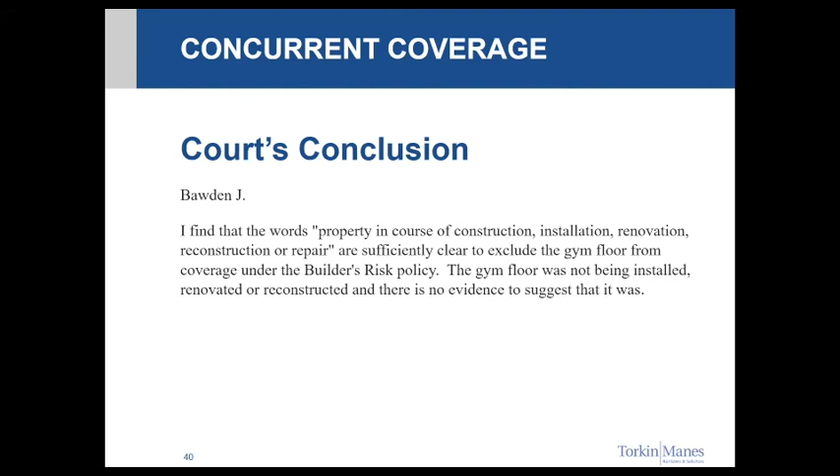So I'll end off with some food for thought. Coverage available under both policies, I think in this case, yes. What do you want to do about division of responsibility? Portions in dispute, can they be referred to arbitration? Perhaps that is a way to deal with larger losses. This was a large loss in this case, hard to believe given that the pipe was so small.

But it was. And perhaps the arrangement to be made is that the two insurers decide we'll split the damages and refer the true apportionment to arbitration, or one of the insurers potentially steps up and covers the losses on a without prejudice basis to arbitrate. This particular type of solution, however, is only going to really apply to larger losses and not to the everyday sort of cases that have less significant damages and need to be repaired in a more timely manner.

Which is why I tried to provide some analysis for how you might want to look at a case where there's damage in an existing building as part of a new construction. And then finally, the reduced exposure for lost revenues and increased expenses is obviously a desirable outcome and a reason to try to assign some ownership early on in the process.